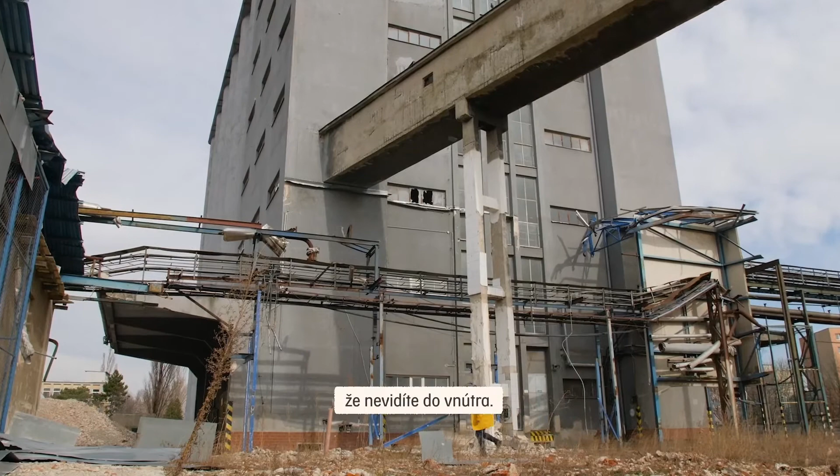What's typical of industrial buildings is you don't really know what's going on inside. They're quite secretive, but there are some really amazing interiors in some of the old buildings.

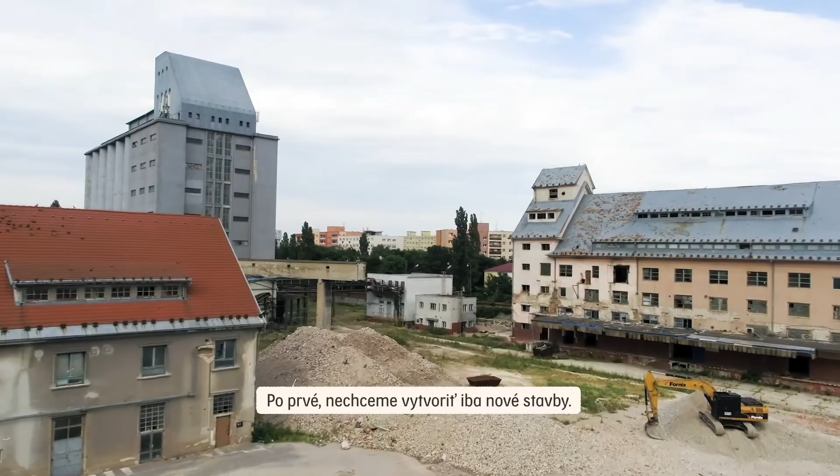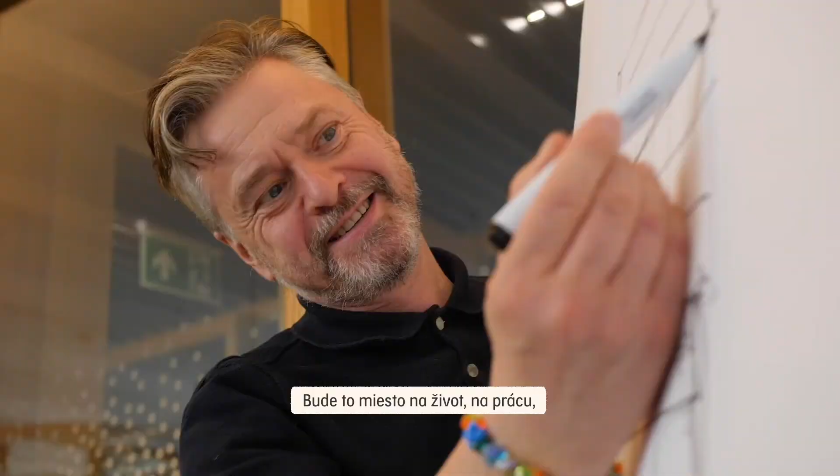So the first thing - we're not just thinking about making a development, we're thinking about creating a new neighbourhood, a new urban quarter. And as an urban quarter, that can contain many things. It will be a place both to live and to work, but also a place to go and do your everyday errands, and also a place you could go to on the weekend for an event.

From that point of view, the public spaces will be important too. This is important for the neighbours, because not everybody's going to work here, not everybody's going to live here, but many, many people will be invited to come and visit this place. So the streets, the squares, the green spaces will be very important. I think that at the heart of this project will be high quality public space that's really inviting and attractive, not just for the people who live and work here, but for the people in the surroundings - they'll want to come here and feel it's their town centre.

Maybe I could start. What I wanted to talk about today was this softer approach. So hello, Bratislava, I'm sorry I can't be there - one of the best town centres in Europe. You are in an amazing situation at the crossroads between East and West and North and South. Of course, for architecture, urbanism, design, you're at an exciting place. And also I'm excited because, you know, I'm a Scotsman, so I recognise an old country and a young nation, so much going on - in terms of makers and creative people doing interesting things. I'm just so glad to be part of that.

I want to talk not only about a project we've been working on, but I'm going to cheat in the next 37 minutes. The first 17 and a half minutes is going to actually be a lecture about some theory on urbanism, how we make good places. And in the second half, I'll talk about the project we've worked on.

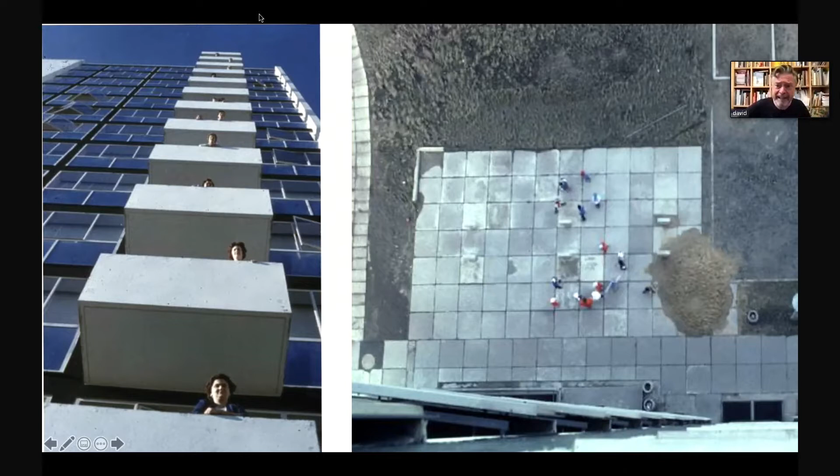He's called the Robin Hood of planning, or the Robin Hood of architecture. But Jan Gehl's story is about working in an interdisciplinary way. He married an environmental psychologist, and they were very critical of modernism - the scale of buildings, the open spaces, the height of buildings. They found out that children couldn't find their way home from school because everything looked the same, and that children who lived above the 4th story didn't go out to play and had fewer friends. So they recognized there were many failings in modern architecture.

The bright light buildings, the tall buildings, the open spaces didn't work. So we created a whole new field of research and knowledge, which we've used all over the world to make places better. Not just Copenhagen, which has gone from being a car city to a people city, but also places like New York, going in with paint to create good public spaces which allow people to live as if they were in Europe, as if they were in Copenhagen.

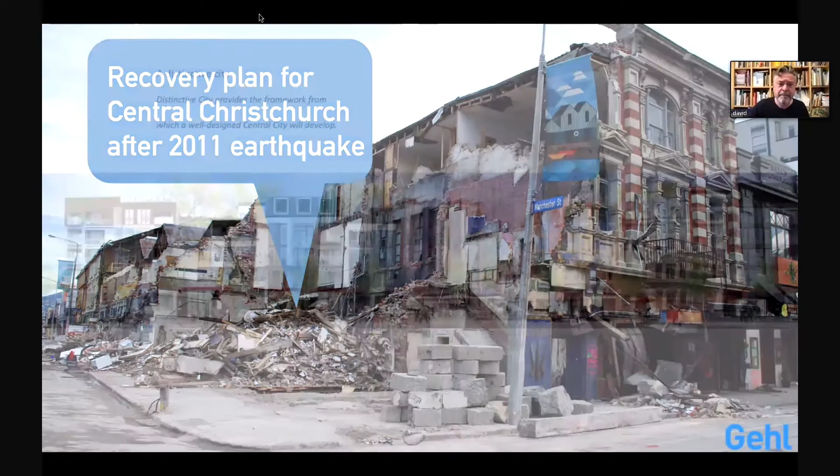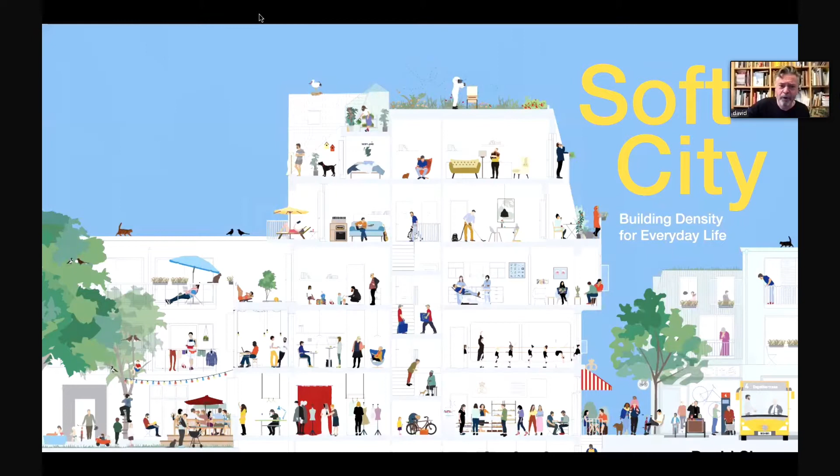And that same human scale, human approach, after the huge earthquake in Christchurch, New Zealand in 2011, made a master plan which could allow us to rebuild at the human scale. I guess this is what I would call the scale of the soft city. What is the soft city? Well, it's something about a scale which promotes the intensity of life. And you have that when I walk around in old Bratislava - that intensity of life is there. So what makes that work?

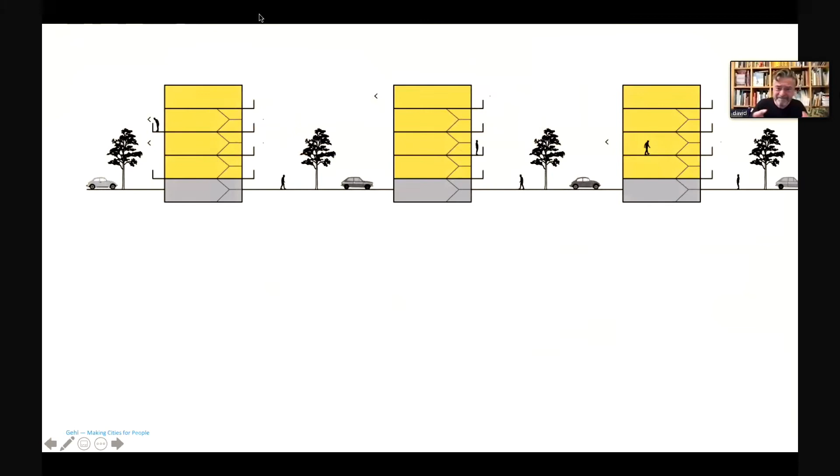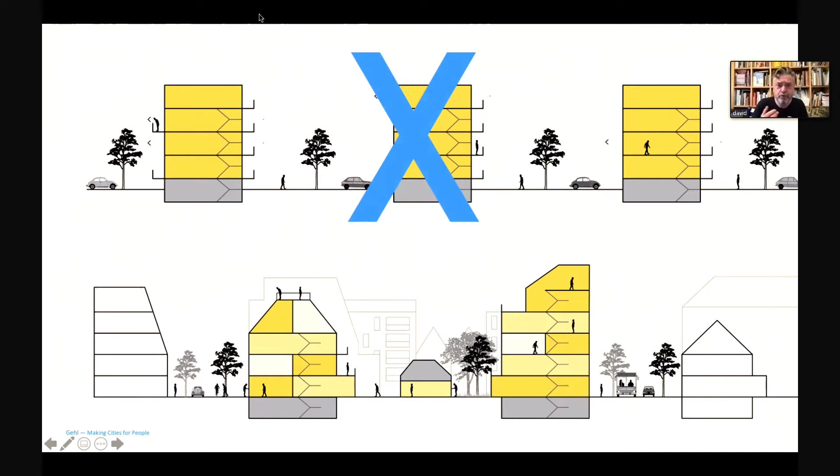But we know that only one of these has the scale of being a human being, and that's the scale we're very interested in. Because we can build similar buildings with the same spaces, but what we need is a diversity of space. The difference between front and back, between public and private, this richness allows so much more to happen, and this proximity can happen.

Why is that important? Well, if we've learned anything from the pandemic, it's that living locally, the ability to do as much as possible in your neighborhood, is vital. So what are the aspects which allow us to live locally?

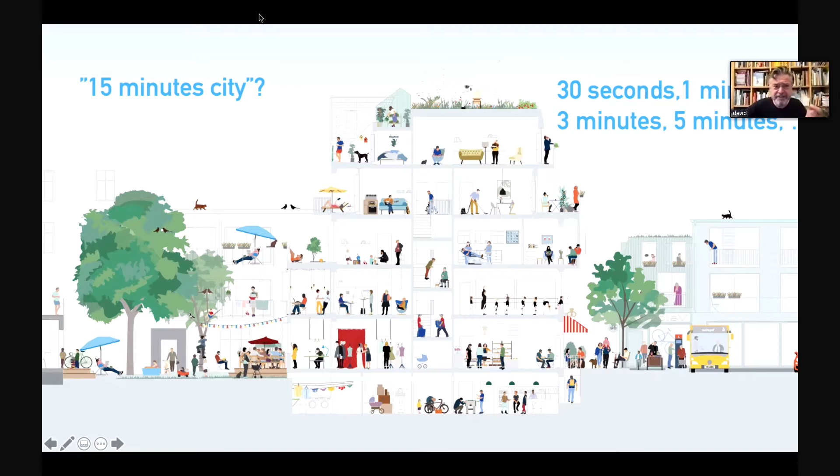Everybody's talking about the 15-minute city, but I would say we have a 30-second city, a 1-minute city, a 3-minute city. It's about the closeness: how long does it take you to go from your bedroom down to the bakery to buy bread, to go from the street into the courtyard? How long does it take for your kids to go out to play into a safe place? It's those seconds and minutes that make up the proximity of the city.

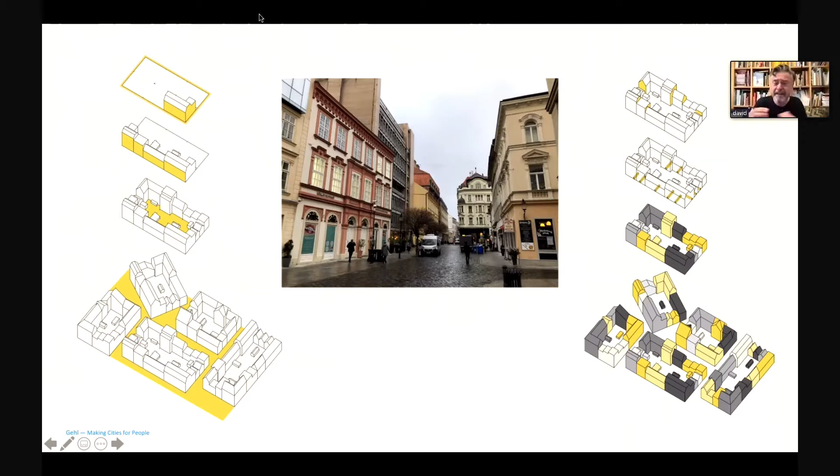And you can find those qualities of the city in Old Bratislava—the definition of space and the diversity of buildings and the variety of architecture.

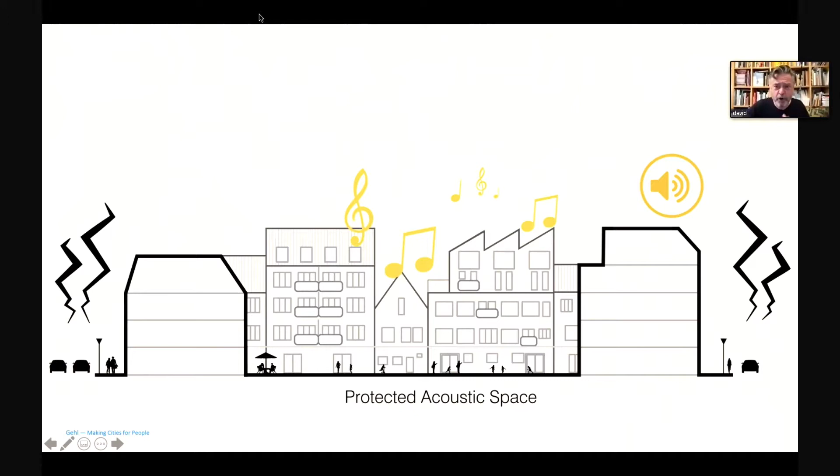A few things we'd like to highlight: the value of enclosure, courtyards, what the courtyard means as a defined space, which becomes very useful when you live in the city, because it's a quiet, protected space, away from the noise and smells of traffic. It's a quiet space which allows you to sleep with an open window. It's a protected microclimate, making it a bit cooler in the summer, a bit warmer in the winter, so you don't need air conditioning.

It's a safe place for your kids to go out and play. So you can be standing, making dinner in the kitchen, and see, along with 100 other parents, the kids playing safely, protected from traffic.

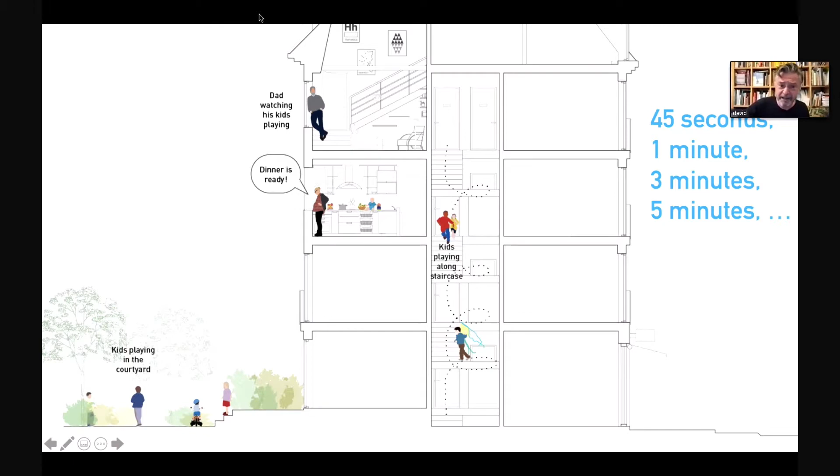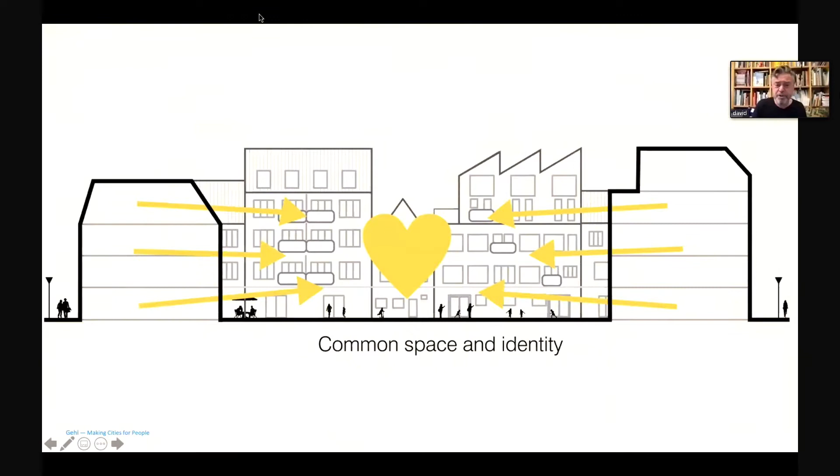Now in Scandinavia, we're using the courtyard as the standard form of building because it delivers density and diversity and so many advantages—possibly most importantly, the common space and identity that you get from public space, from that shared space. And so it does so much.

The next thing is the value of layering—not stacking a building like pancakes, but making a difference in layering. The ground floor is different from the middle, which is different from the top, making buildings which make the most of the ground floor.

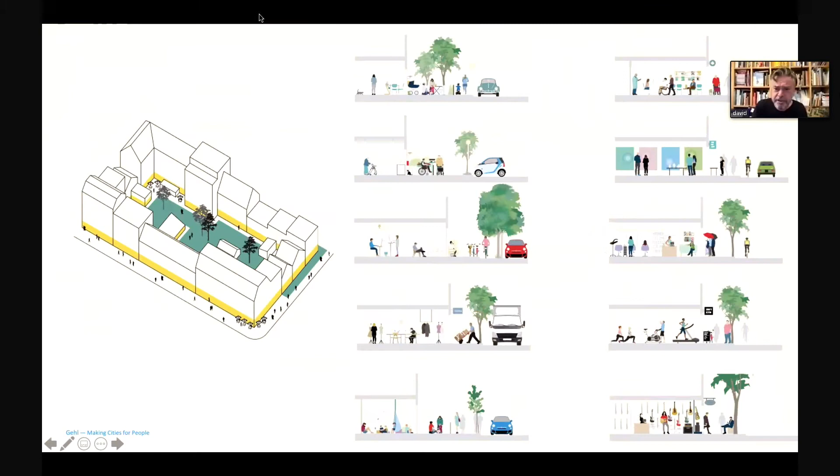We've discovered we can do so much more, activating the ground floor, even for residential. We can get an increase of 25% in value for the ground floor if we take care of the edge zones, which connect people between inside and outside.

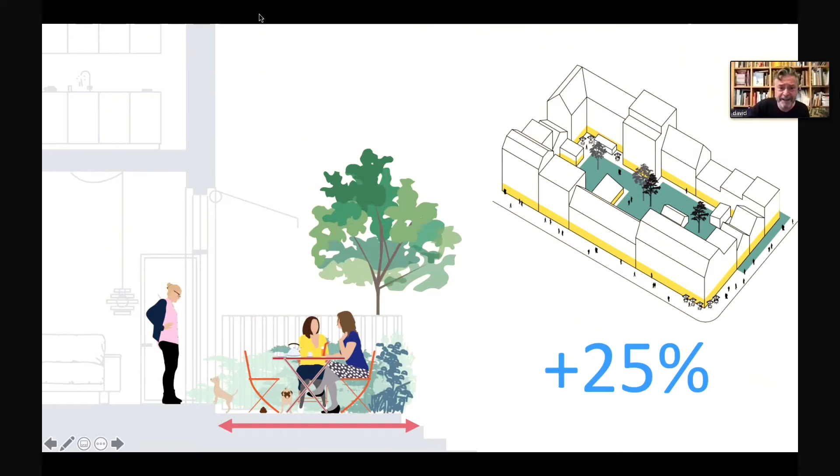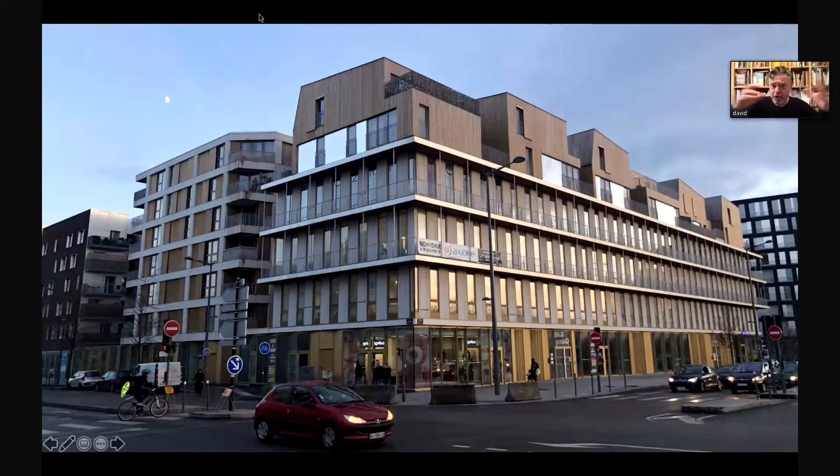And of course, if we build at this lower scale of 4, 5, 6, 7 stories, we've got much more penthouse, so more people can live with the sky, and you've got this amazing connection with the surroundings. We've got these kind of layered buildings, which really make the most of their urban location.

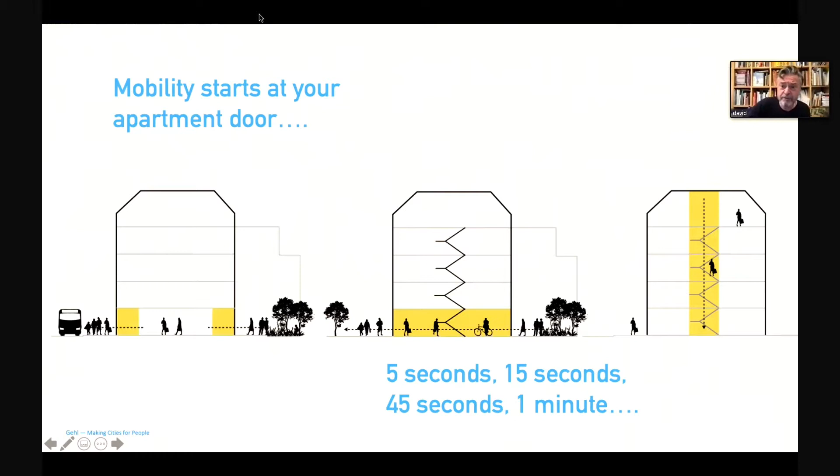Soft mobility—the minutes, the seconds to move around the city—connecting places: our apartment with the bus stop, the directness of going in and out. 5 seconds to go inside a building, 15 seconds to go from the street to the courtyard, maybe 45 seconds to go from your apartment down to the street. A scale which connects you from your home, from your office to the outside, making walkability possible.

This is Copenhagen, where the pavement, the sidewalk, continues across the side street, where cycling could be for everyone—even granny and grandpa can cycle, children can cycle safely. And of course, they're connected in a kind of ecosystem of city life because they're stopping at the shops, interconnecting with other people, everybody at eye level.

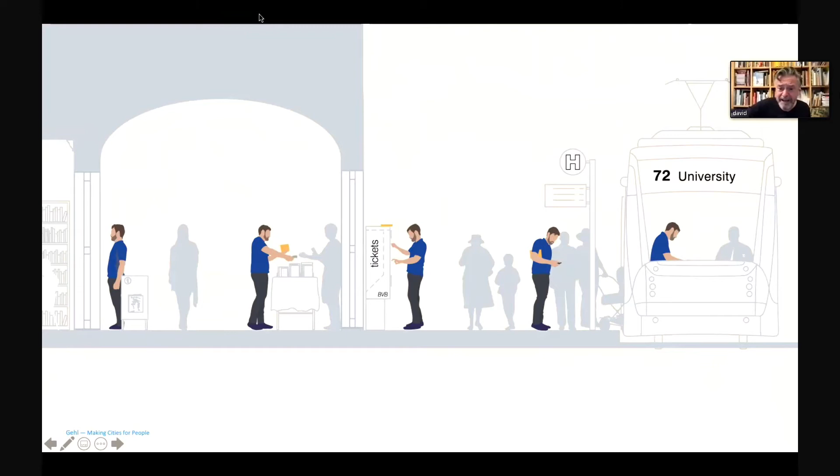And of course, this thing about transportation—having a beer or a coffee while you wait for the bus—this connectivity with street level mobility, trams and buses. And as you move through the city at eye level, you see so much more. You connect with people, you connect with place, you connect with the weather, you see the leaves and the trees, you see the sky.

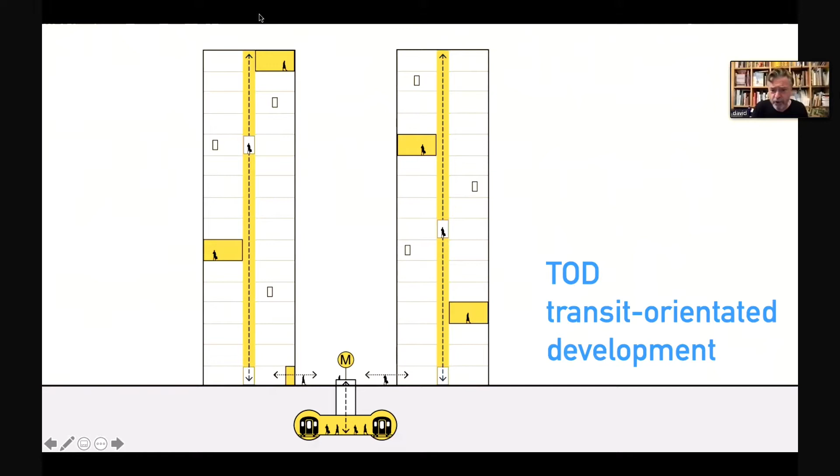And so we shouldn't be talking about TOD, transit-oriented development. We should be thinking about neighborhood-oriented transport—everything that happens at eye level that connects you, your apartment, your workspace, with your surroundings.

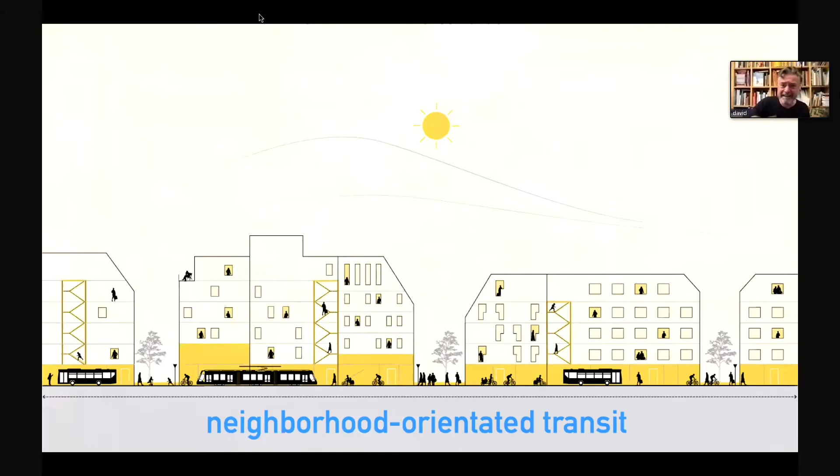And Helsinki, the most livable city in the world. This could be Bratislava—it's got all the same components, if you work with those components.

Finally, the last bit of theory: being connected to the environment. There are so many things we can do to connect inside to outside. By making the right kind of forms, we can build our own weather—make it cooler or warmer. We can protect from the wind to make a place warmer in the winter, create shade in the summer, so we need less heating, less air conditioning.

We can learn from those old environments and have a scale which allows us to create our own microclimate. Small details, shades and shutters, can allow us to adapt and live well using simple technologies. And all the spaces—those little edges of the building, the balconies, the loggias, and the terraces—connect inside and outside and allow us, even in the city, to be connected to nature.

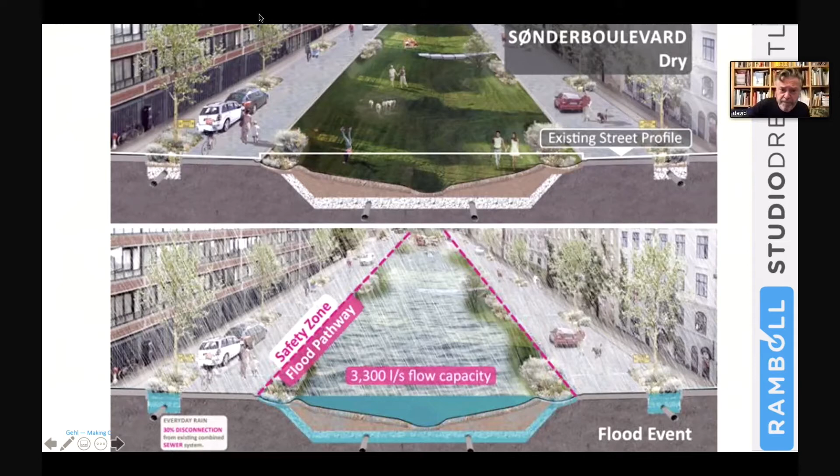Finally, recognizing in times of climate change, the lessons from Copenhagen: where the cloudburst, the extreme rain, rather than putting everything underground and overloading the sewer system, we can make floodable public space that can absorb the extreme climate. This is the climate quarter in Copenhagen. It's become a more lovely place because it's greener, it's cooler, but it also performs better in the rain. You can put all of this together—all this theory about physical structure, about mobility, about living with the weather.

We can put it together and create density, diversity, and delight. Those things together might help us find—because I see this pattern of little villas and very high towers, but there's this other scale, you might call it the missing middle. This is the classic European tool for building city, and this is what we have to rediscover.

All over the world, we're seeing this scale rediscovered—new interpretations of simple technologies, of a human scale, of a diverse building stock, which makes pieces of city that people want to live in. So that's my theoretical base: we can urbanize at a human scale.

That was a very long introduction for a project I'd like to talk about, because what does all of this mean for Bratislava? What does this idea of the soft mean? Can we build soft in Bratislava?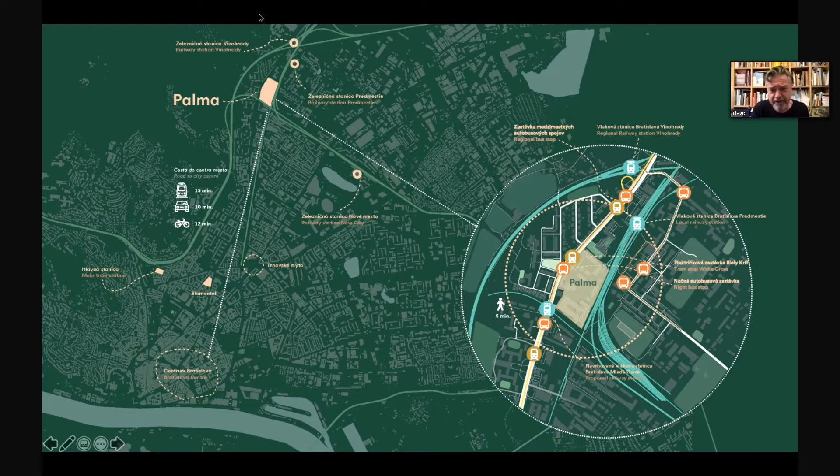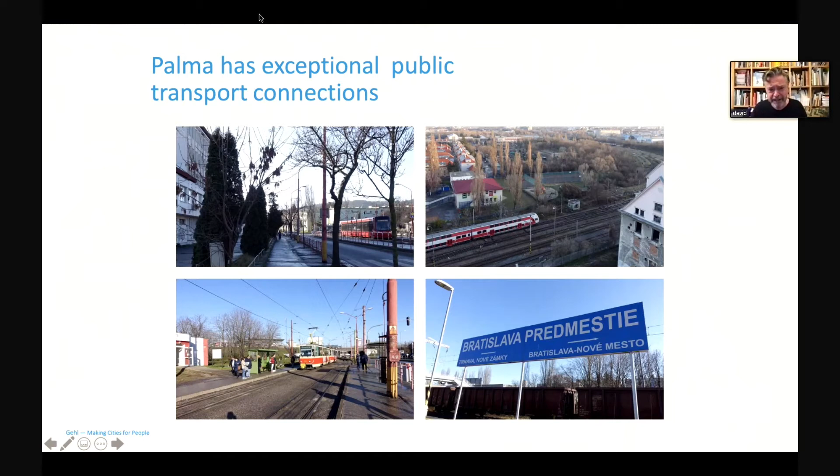We at Gehl have been working with CORWIN for the last couple of years at PALMA, a former industrial site in the north of Bratislava, close to the old town center. You can see it on the plan here, and also it's a site extremely well served by public transport. Honestly, I don't think I've ever worked on a site so well connected with public transport, with tram, with rail—it's quite exceptional. And of course, it's brownfield.

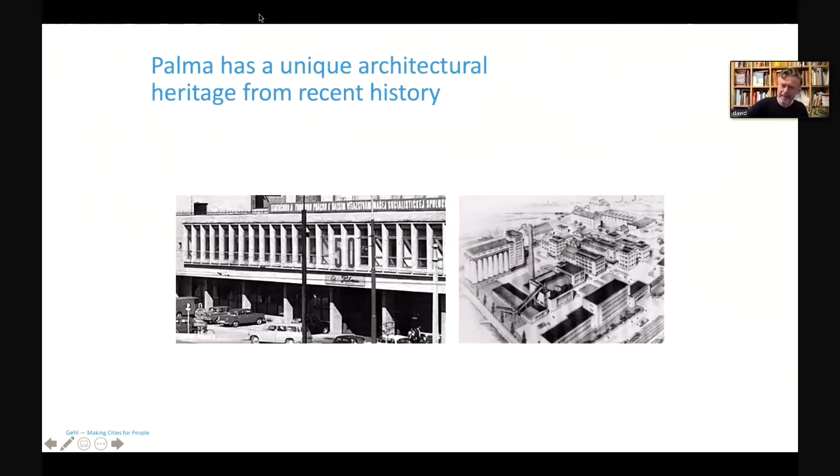This is exactly the kind of site we should be working on. Just like Malmö, it's a brownfield site where we're using existing infrastructure, using used land for denser, more diverse use. There's amazing heritage on the site, and I think that's something we don't talk about. Everybody knows the heritage of old Bratislava, but we don't talk about the heritage of the 20th century, of industrial buildings, and there are some real gems on this site.

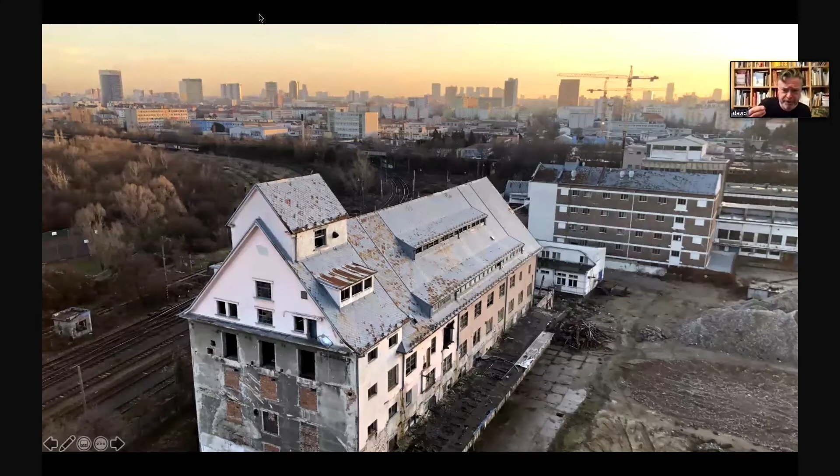I think it's important that as we started this project, we were aware of the amazing opportunity of these buildings inside and outside—the architectural archaeology, the industrial archaeology—as we studied these places and how we could integrate this amazing history, the history of more recent times, into our project. These are just some shots of the inside of the building, some that influenced us when we started our work at PALMA.

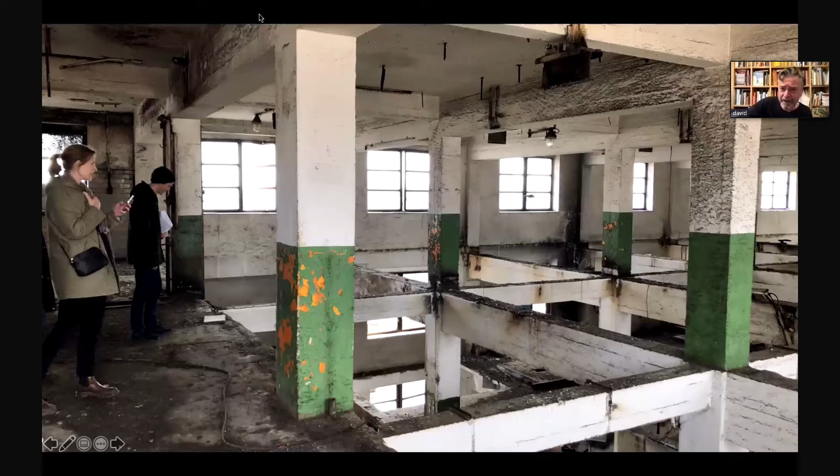The great thing about PALMA is having really, really good neighbors. We've got a great variety of population around us—residential districts, the university, Nová Cvernovka with its makers and creative people, and landscape around us. Great neighbors.

So can we build this soft city in Slovakia? You can tell I'm very optimistic. We brought our experience from Copenhagen, from Scandinavia, from Malmö, and we found it was very hard, because this traditional pattern of building requires a bigger footprint—it requires bigger surfaces because it's about enclosing space.

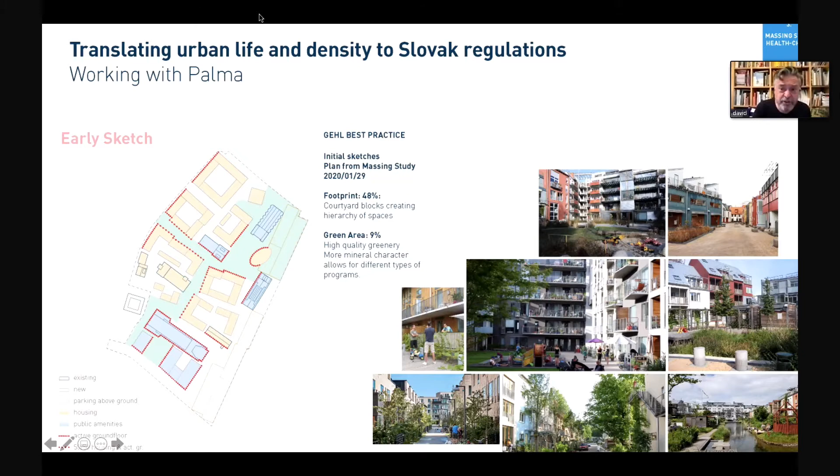And generally there's less green area. So a big challenge was that all of the Slovak building regulations are designed for modernism, for standalone buildings in a big open landscape.

And that's the structure which we know doesn't work so well. So we had the challenge of a 35% maximum footprint, the assumption there should be taller buildings and larger spaces, an assumption of 25% green area, and a 30-degree angle required between buildings. This makes it impossible to build anything dense and closed.

The center of Bratislava is totally illegal under these rules, so we think that's wonderful - we can't build it today. There was also the challenge of really quite extreme parking requirements. Although we're hoping to work with assumptions about soft mobility and public transport, we really had to consider the traditional 20th century way of lots of parking.

Of course, there were great potentials too. There was a potential for 50 to 70% residential, so the idea we could have mixed use. And that big green area allowed us to think about stormwater presence and urban cooling through planting. So there were opportunities too within the regulations.

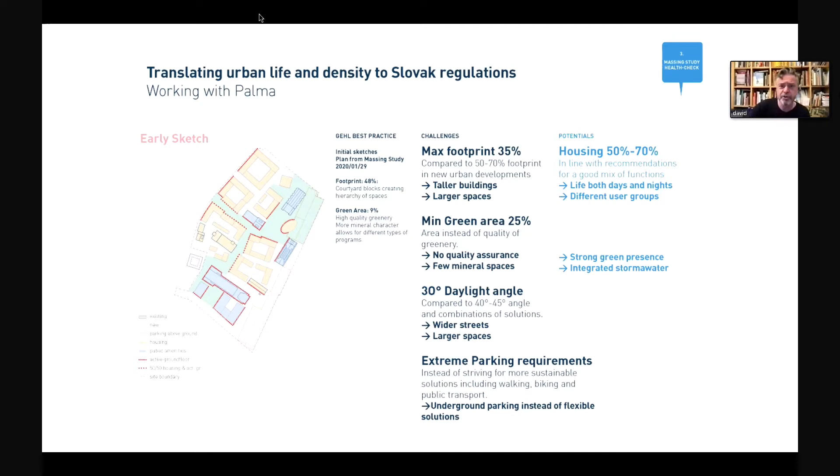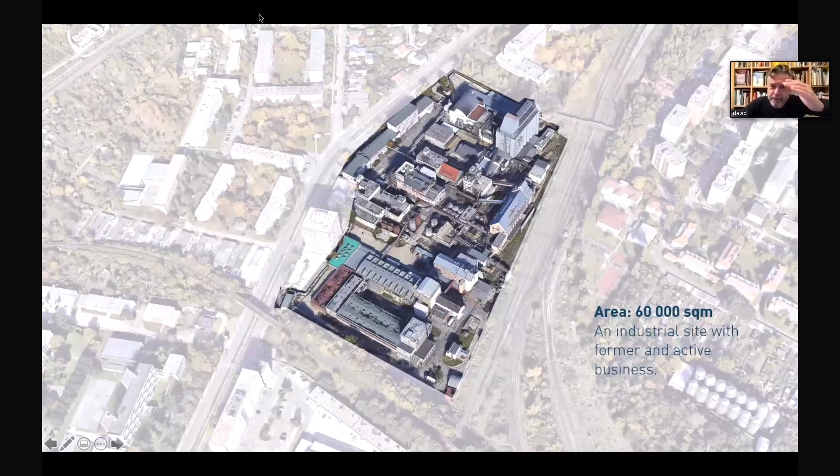So let me tell you the story, how we went from analysis to concept. This is the site from above - you can see this exciting industrial site, 60,000 square meters. And I'll do my little sketch, this is my kind of hand sketch.

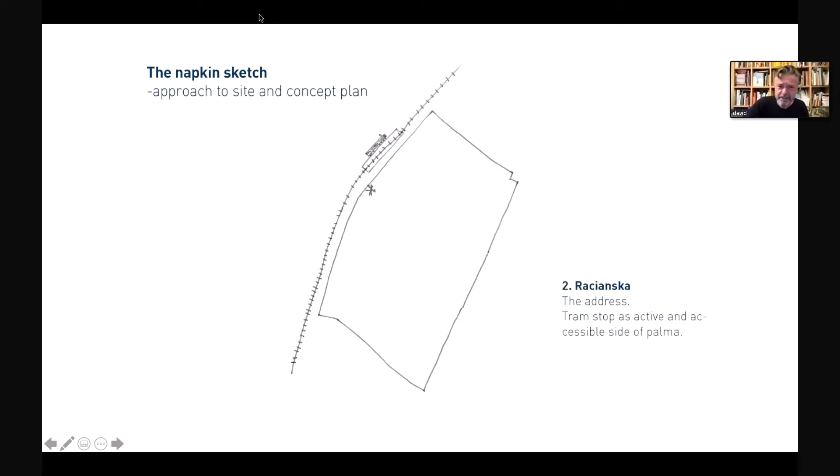What's very special is you've got this bend in the road at Racianska, the boulevard - this was our placemaking. We've got the tram stop at Racianska, a great address, with this bend in the road. From that we've also got the noisy side to the east, and a rail bank to the south, so we've kind of got an island.

So we've really got to work - we've got to look north, we've got to look east if we want to connect. So we've got this great neighbor to the north, Nova Cvernovka - we'll make the most of that, so let's really speak to that.

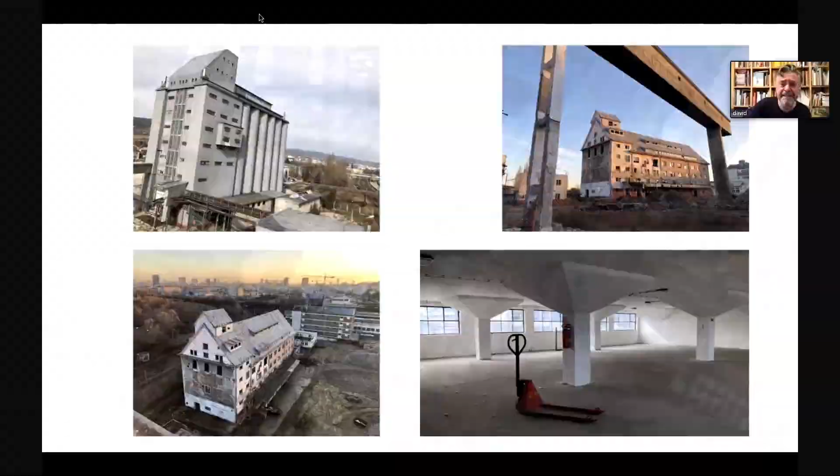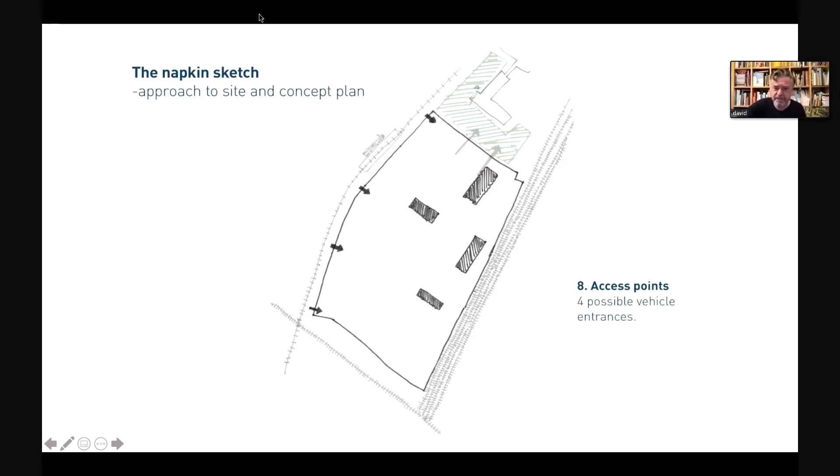We have to make the site accessible and work with existing traffic, so we work with existing access points. But importantly, we want to reduce the impact of traffic, so we bring traffic around the back of the site so car traffic won't dominate. Then we have a very light network in between, which will be much more pedestrian.

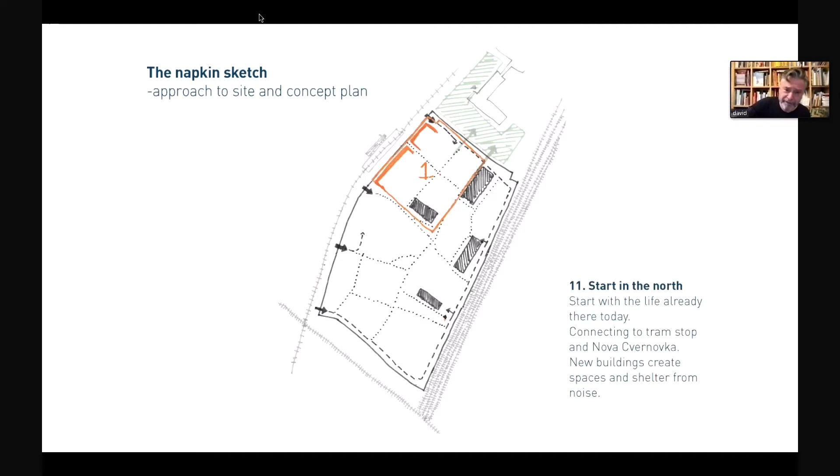There's an idea that development would start in the north, where we've got the tram stop and the good neighbors in Nova Cvernovka, and then we phase the development going south. Another idea is to concentrate activity in the north of the site at the tram stop where the busy stuff is, and have it quieter to the south.

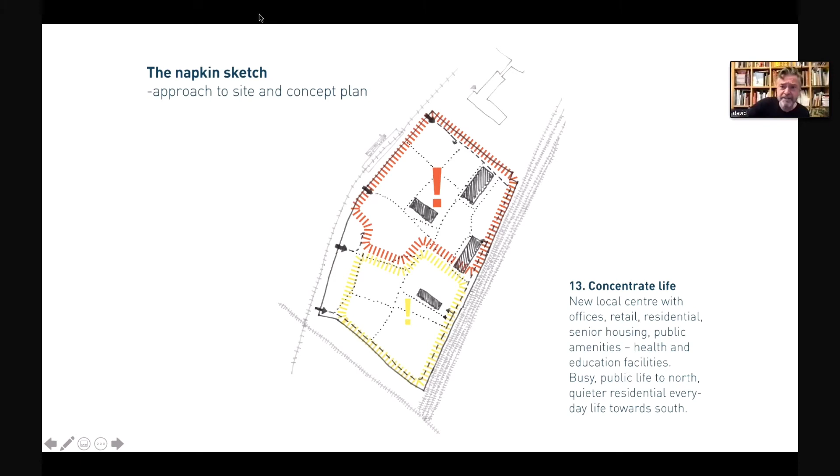And this is the idea of a Kickstarter - can we start the project straight away? It's a big project, but can we build this little first fragment of city, beginning by talking to the neighbors, speaking to Racianska, making the most of the tram stop? Then after that, we can build south and fill up the site from north to south.

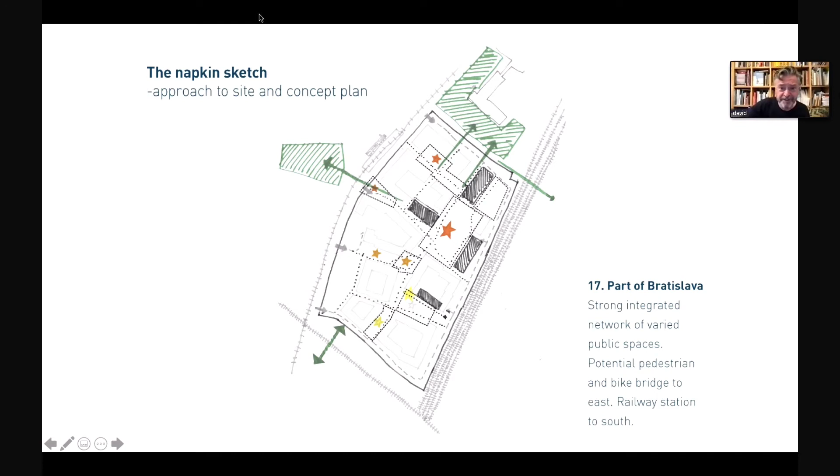And all the time connecting to the neighbors, to the north, to the east, but also to the south, and of course with a bridge over the railway tracks to the east. In this way, we can imagine a piece of city, a real piece of city connected with its surroundings.

So now let's dive in a little deeper and understand it better. If we want to make a lively, living place, we have to really think who's going to come - our residents, locals, visitors, the neighbors, people who live in the surroundings, people that come to visit. We have to offer something for everyone, from the residents and workers to the visitors and neighbors.

And also thinking throughout the day, so we can have as much life as possible - there's life in the morning, in the evening, in the middle of the day, at lunchtime.

How can we make this a vibrant place throughout the day? We do this by working very actively, speaking to the surroundings, looking at those connections. Our red lines mark the busiest places, with loops of activity connecting with the surroundings, so we really speak to the neighbors and interconnect.

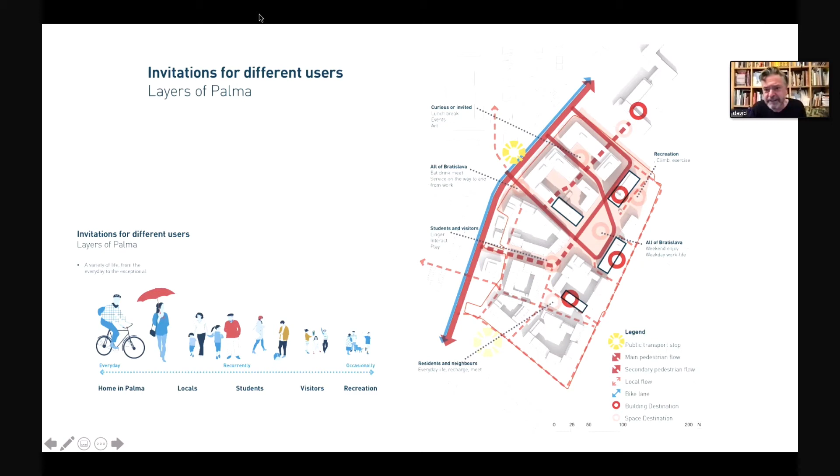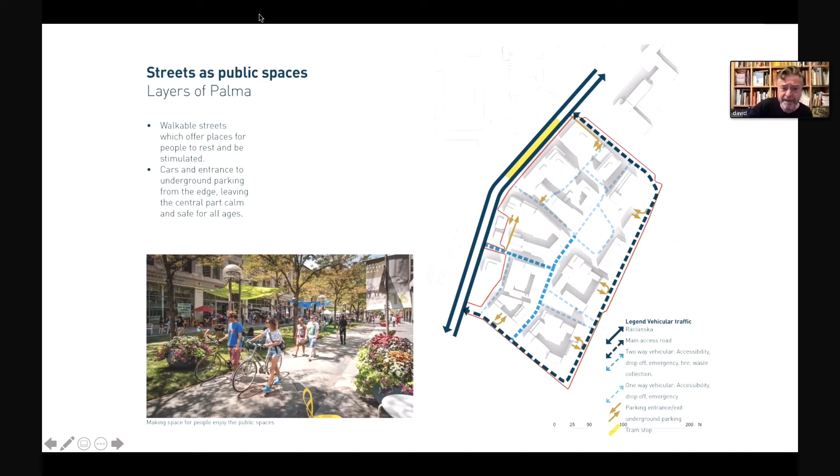The red is bright all day, inviting people in during the day and the weekend, thinking of the streets as public spaces since we can make the most of those. The blue areas are much calmer. The dark color around the edge represents traffic, so the traffic stays on the edge of the site and gets lighter on the inside, with minimal traffic to encourage people to use the street not just for driving, but as a place to walk and spend time. The streets as public spaces.

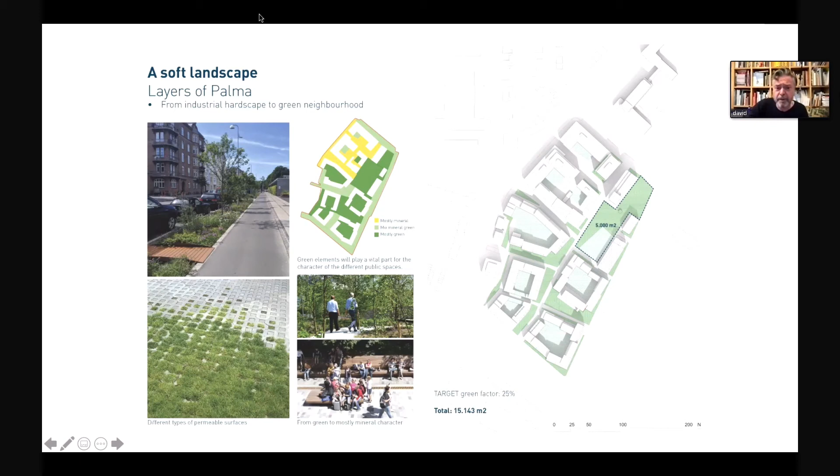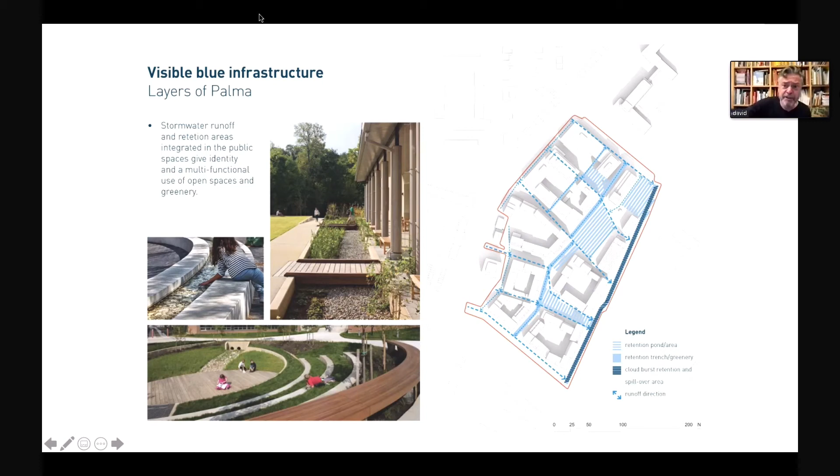In a similar way, we can think about the soft landscape. It's a green site, maximizing the green, the courtyards and the public spaces, making green spaces. And also, like Copenhagen, blue spaces too, considering the water and the runoff, taking care of that locally. That can be part of the big concept of what we're trying to do.

We need diversity. People are different, so we need different kinds of spaces. We need some wow kind of spaces, really fantastic, where the whole city can come and have a party. We've got some cool, exciting spaces, but we also have calm spaces, places where you can open your door and let your kids run out and play. And there are even places so calm you can sleep with an open window. So this variety of spaces serves the different needs of everyday life.

It's busier in the north, quieter in the south. The courtyards, because they're protected, can create that calm. And of course, as I said, we've got these amazing existing buildings—each of them offers a huge opportunity to do something special.

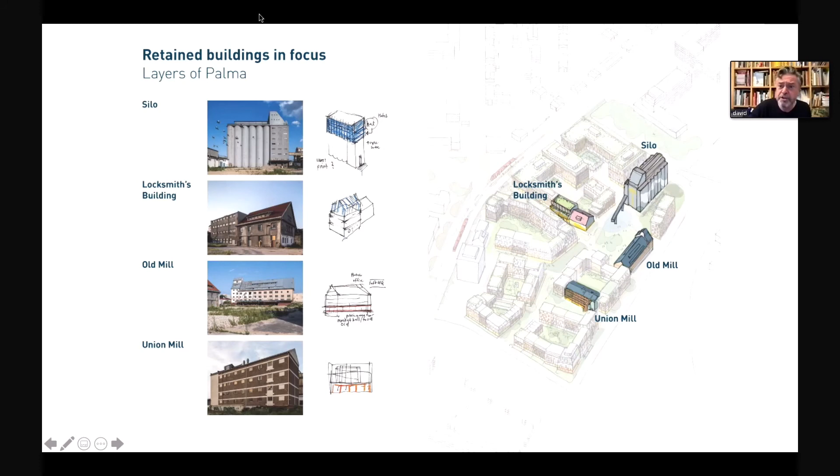However, it has to be said that while they're a wonderful opportunity, nobody thanks you for working with an old building, because old buildings are quite inefficient—you can't squeeze parking underneath them, so they make the site much more difficult. I think it's a challenge when we deal with the architecture of the 20th century. If we were doing a project in the center of Bratislava, there'd be so many allowances made, but we have to start thinking how we can be more tolerant and more generous with projects that use these existing buildings. And of course, we want to maximize their visual presence to make identity.

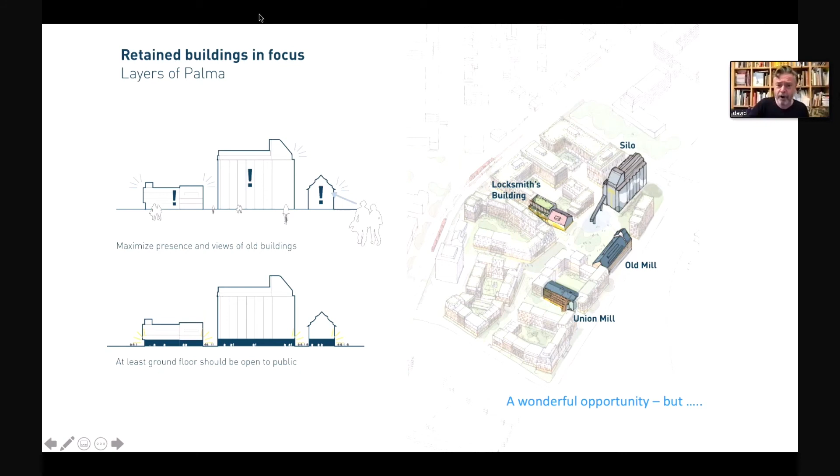This idea is that the ground floor, at least, should always be public, to make them really part of the heritage of the site.

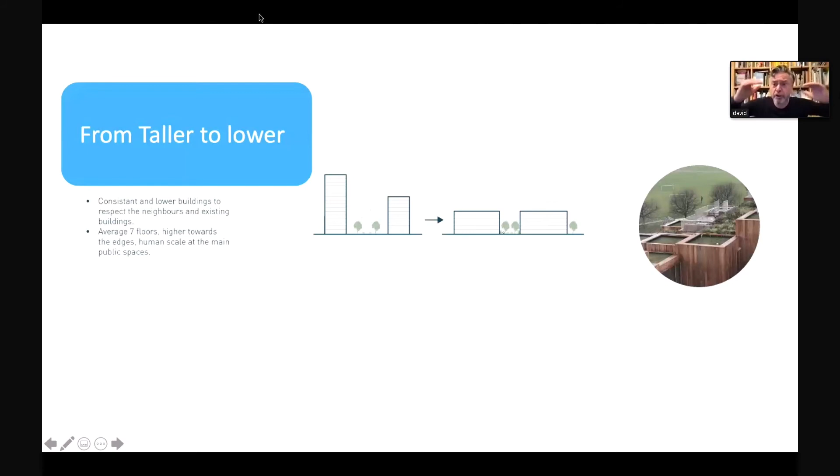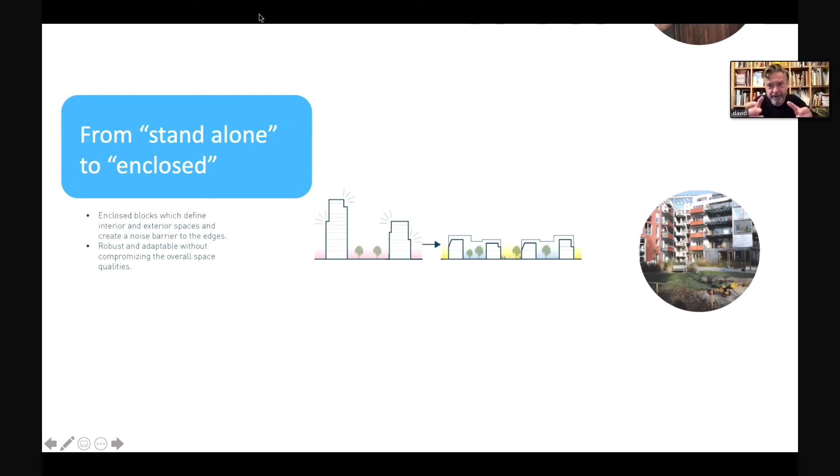Remembering that we can deliver density in different ways—from part one, how do we want to build? We want to go from taller to lower, making lower buildings. We also want to go from stacked to layered buildings, to have these layers. And we want to go from standalone buildings to enclosure, to make defined streets, defined squares, courtyards, and protected spaces. Those are our principles.

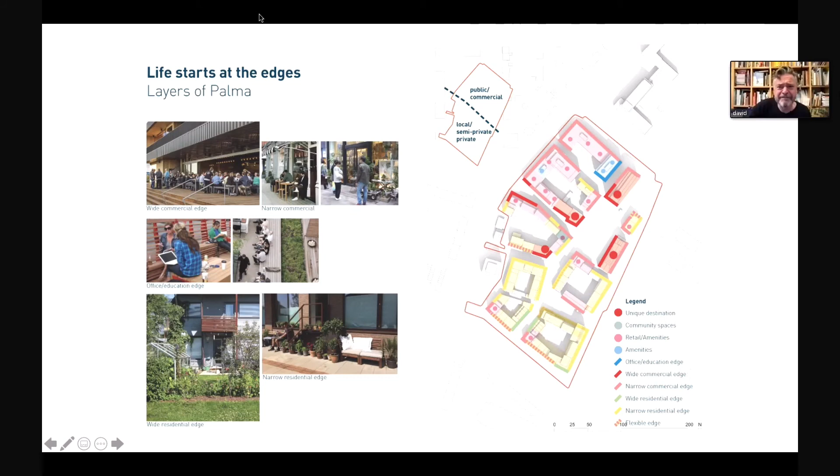With those principles of lower, layered, and enclosed, we can think about the edge being very important to make active spaces, and we can have this distribution of the massing, so it becomes like a piece of city with this variety of spaces and scales.

How can we be sustainable? Well, we can reuse the buildings, reuse the materials, recycle the waste, and recycle the water. And in the new buildings, we can use more sustainable materials like timber.

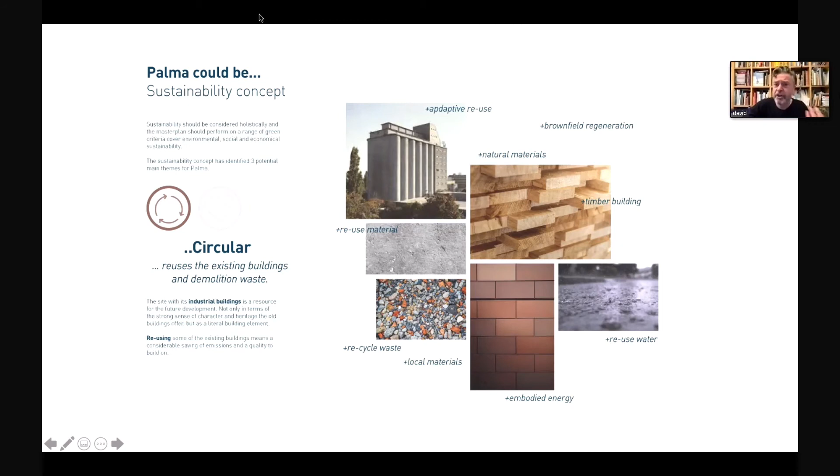That's the circular approach. We can also be sustainable by being healthy—making it walkable, making it possible to spend more time outdoors. We can have local food production, use daylight. Natural daylight is one of the most important things for physical health, so we make it a healthy place.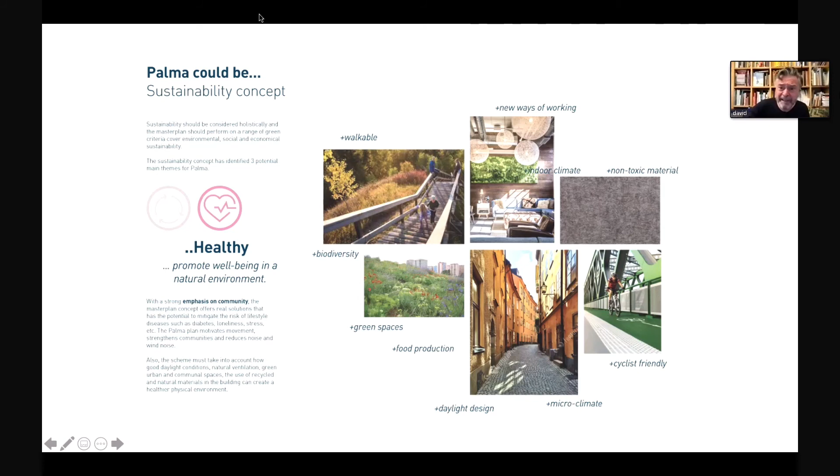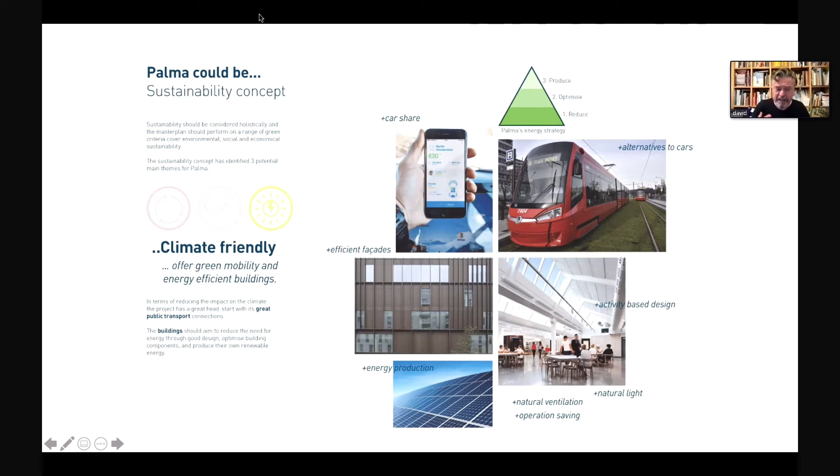We can also make it sustainable and climate friendly by having a whole range of technologies, using the public transport infrastructure, so that we're climate friendly in that way too. Natural ventilation, natural light—goes without saying.

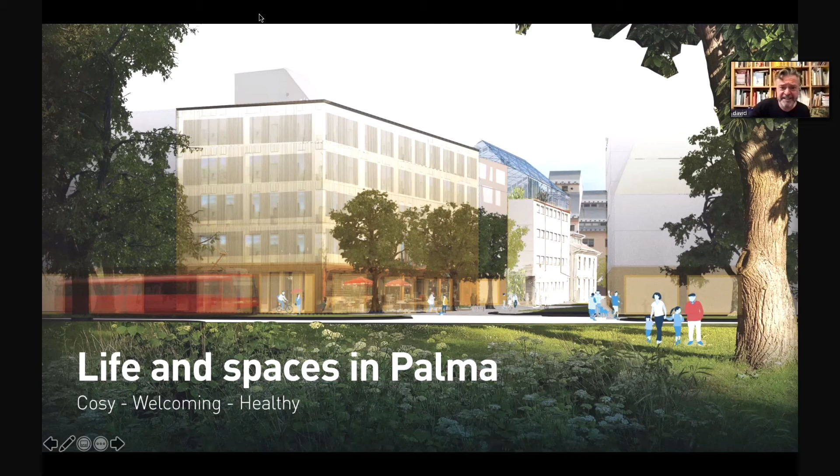And finally, the last part is how to make a truly cosy place—we start with life and spaces. So here we are stepping inside from Racianska, looking into the site, and we can see from the tram stop the mixture of old and new buildings.

We have a range of spaces, like I said, the wow, the ah, and the shh—this range of spaces, the busiest ones toward Racianska, getting calmer as you go towards the east and towards the south.

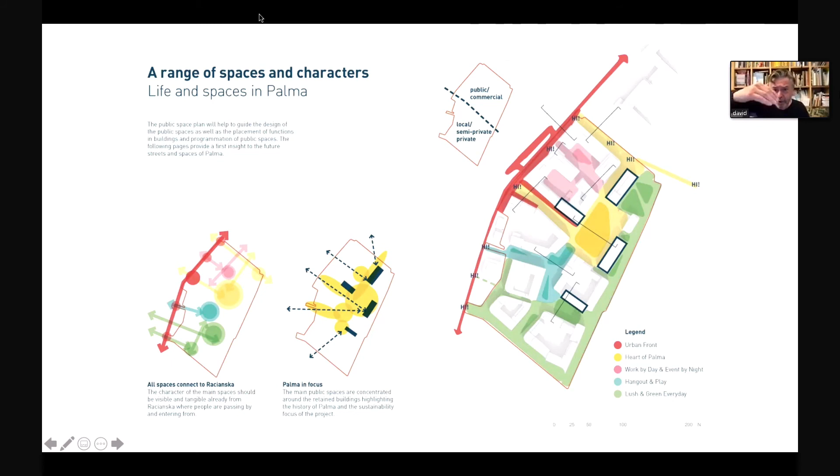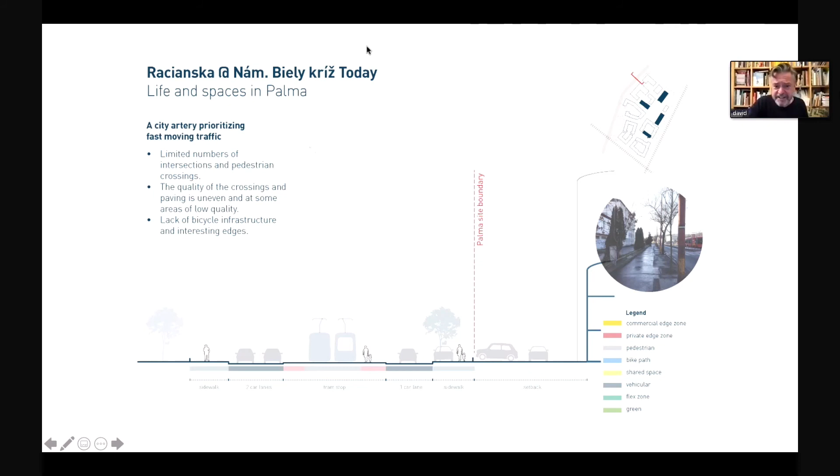Starting with Racianska, we wanted to really imagine this in the future as a boulevard. This is the existing section. And what was important when we rebuilt it, we wanted to be generous to the city.

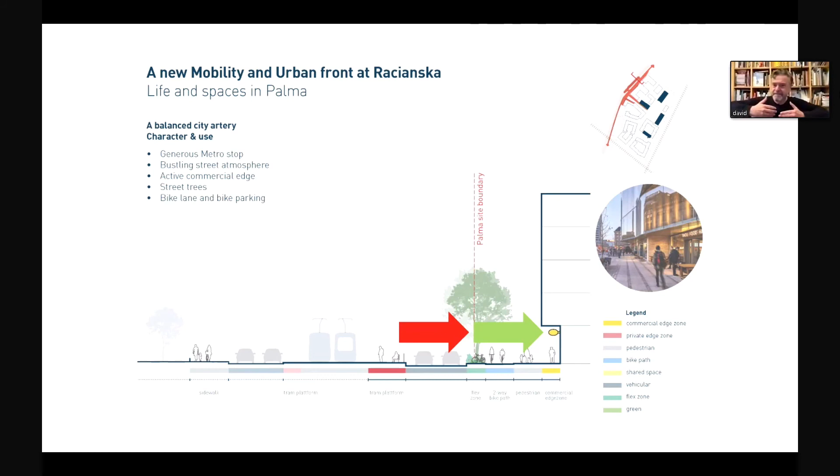So we've actually stepped back, giving some of the site to the city so there's more space for cars, better capacity for cars, and for expanding the tram stop in the future. But also stepping back to create a green zone towards Racianska, so we're stepping back to get more space to speak to the city.

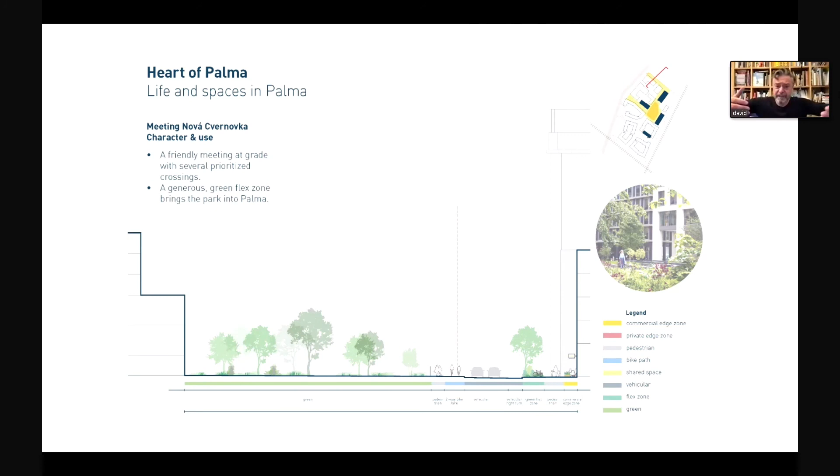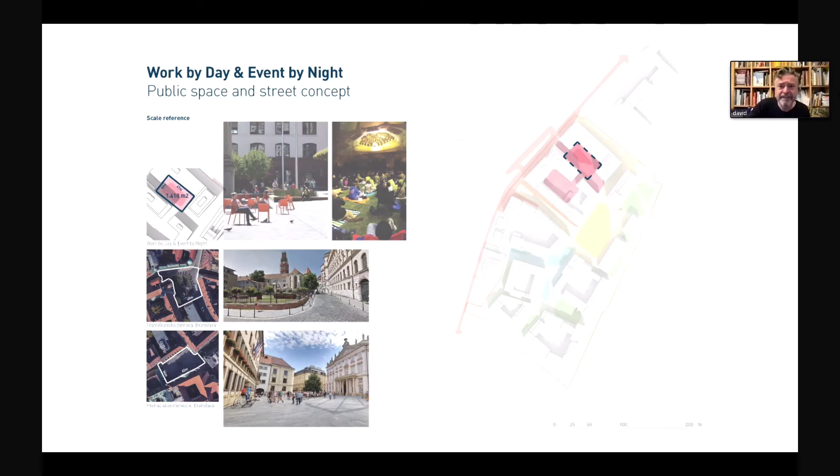To the north, as we meet Nová Cvernovka, we're making the most of that open space, respecting it as well. The enclosed space in the north, in our busy working zone, lets us contain the nightlife. And then we have lots of green spaces around the site at scale.

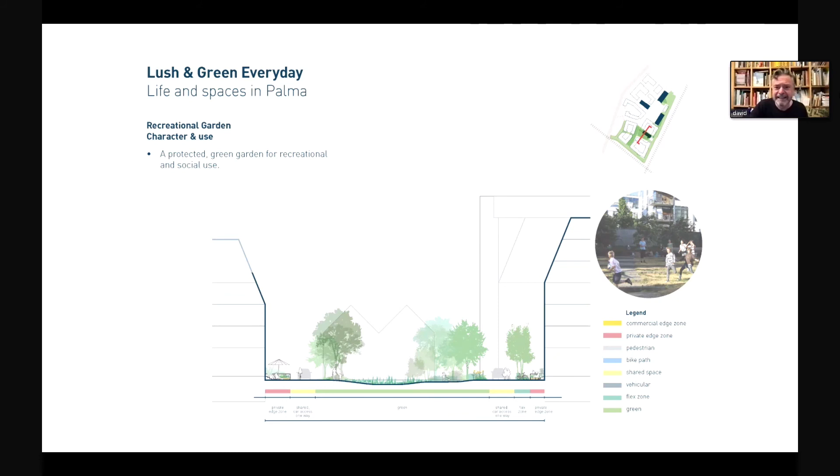This is just a little section through one of the main green spaces. You can see the scale, the size in relation to the height of the buildings, the soft edges, and this idea that we can have this very lush green space, making it nice to live, both for visitors and of course for the residents, a place for children to play in this former industrial site.

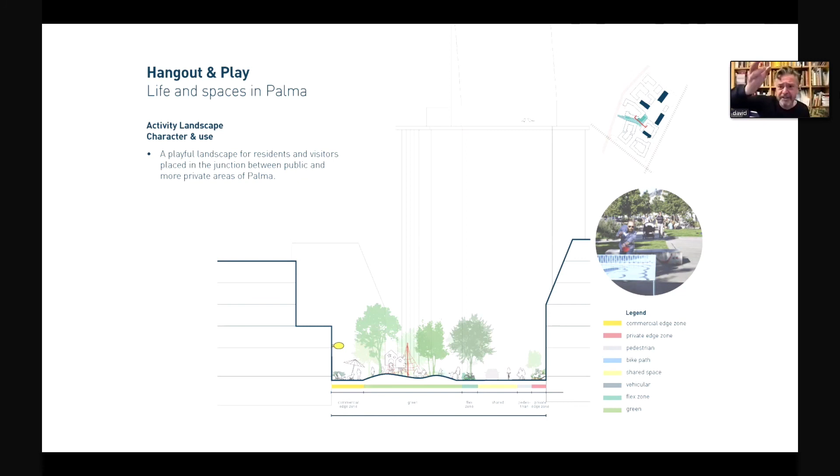We've also got this place to hang out. Our streets we talked about as public spaces, so green streets to hang out. In that street space in the middle of the site, we've got a lot of greenery and usable space. This is looking towards the silo, you can see this hangout space, a lot of space for people to use.

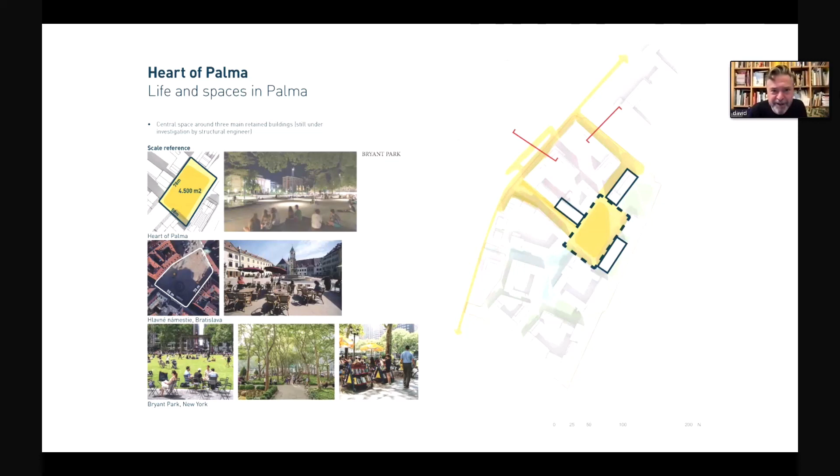And then finally, as we go towards the silo, that big hard public space, this heart of PALMA, the big event space, maybe something like Bryant Park in New York, a multi-use space where you can do lots of different activities.

Something like this, a space, a big generous space with a diversity of architecture and activities going on, a place where you could invite the whole city to come and play.

Our idea is to have a kick-starter. We want to start the project as soon as possible with beautiful new workspaces, well connected to the tram stop, creating those courtyards. It's the first step showing that this way of creating a piece of city is possible, integrating some of the old buildings, including that locksmith's building. So we've got already the reuse of the old buildings, courtyards, and it's that first fragment of city.

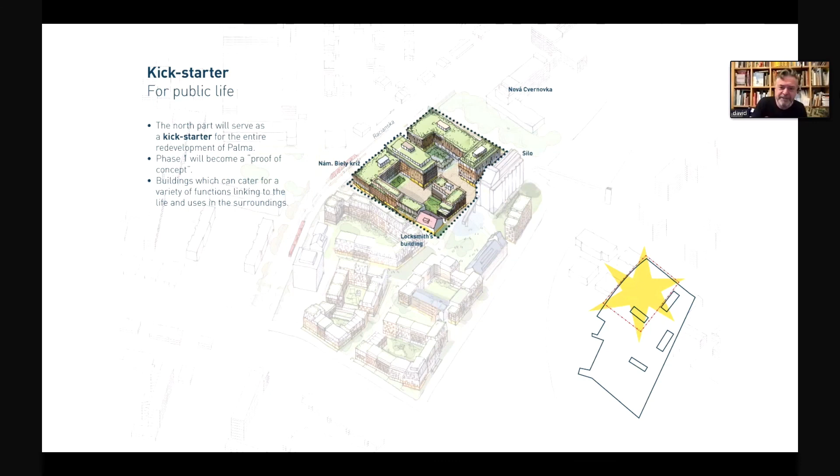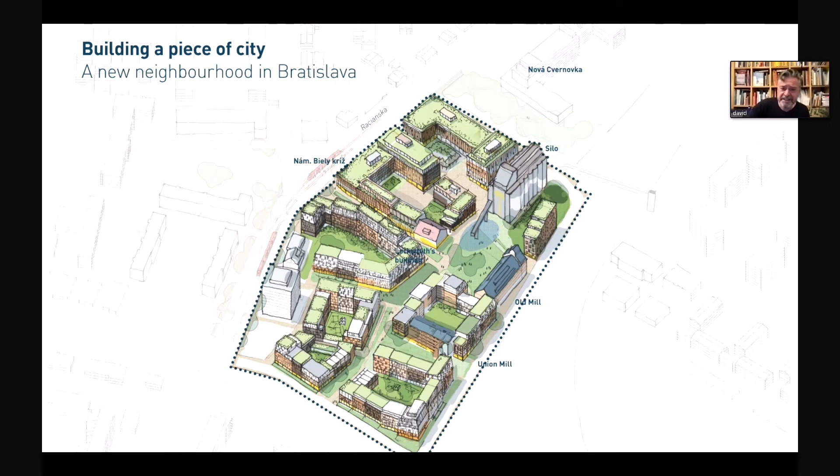And from that, we hope we can build a piece of city, a new neighborhood in Bratislava, something with a human scale, but at the same time totally of our time, diverse and dense at the same time. So it could be something like this.

I'm looking forward to the next chapter. This is from our concept design, seeing it grow, seeing the architecture developed, and seeing this new neighborhood grow in Bratislava. And I'm looking forward to my next visits. So thank you very much.